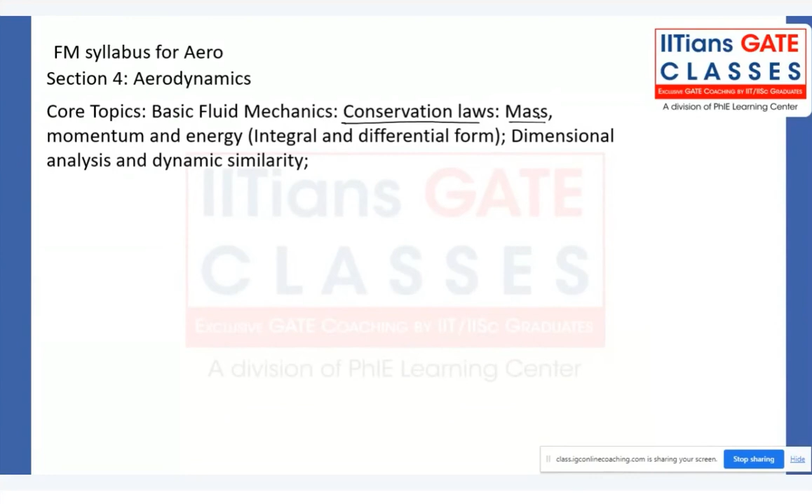Any of you in the class, whether you know about the continuity equation or not - you might have studied it in BTech. Yeah, so most of you guys know the continuity equation, that is mass conservation, right?

And basically we use that. That is a very basic thing for fluid mechanics, because mass cannot go anywhere - it has to be conserved. Now that is one thing. Second thing will be momentum conservation.

Can you tell me - by mass conservation we are getting the continuity equation, right? By momentum conservation or the momentum equation, what are we getting? Which type of equation are we getting?

Yeah, that's fine, drag force you will be getting. But once again, by the momentum equation, that's the Navier-Stokes equation, correct? And of course we have the energy equation - whenever dealing with temperature changes or heat transfer, we deal with energy equations.

Then we will have dimensional analysis and dynamic similarity. But basically, when we say these things, precisely we are dealing with this core fluid mechanics topic they have mentioned. Definitely you will learn mass, momentum and energy conservation once again from the aerodynamics faculty also, so that is not my main aim of what's to be covered in this class.

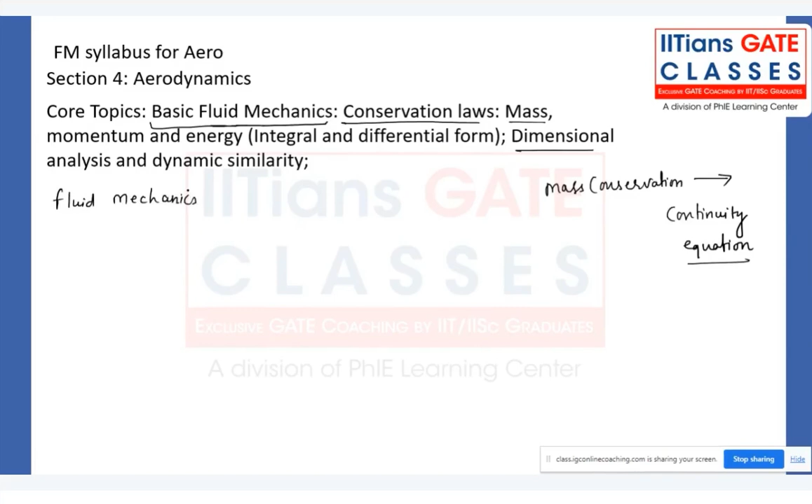So basically, if I write what fluid mechanics syllabus we will be covering - that is the official syllabus, a very official syllabus from the GATE website. But for fluid mechanics for aerospace, what are all the topics we have to cover?

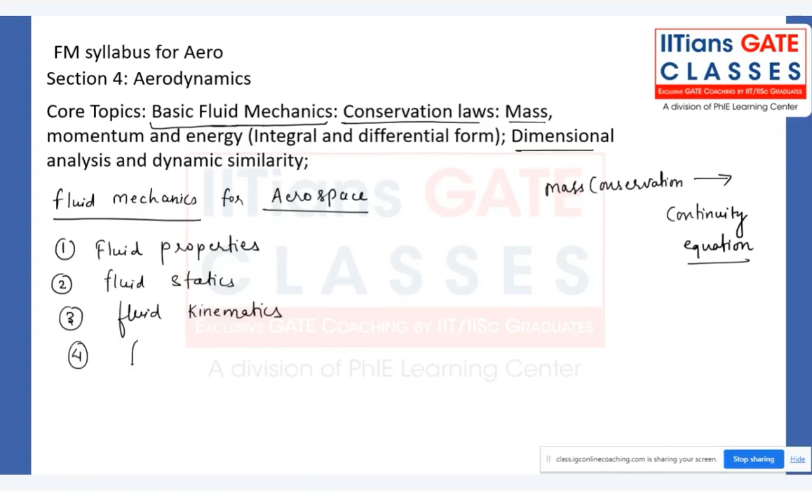The first one will be fluid properties. Second one will be fluid statics. The third one will be fluid kinematics. The fourth one will be fluid dynamics. The fifth one will be laminar flow.

Again, in laminar flow, we'll discuss each and every topic separately, case by case - one case will be fluid flowing between two parallel plates, fluid flowing in a pipe, and of course we have Couette flow. We'll discuss each topic, but you have to be a little patient. Sixth one will be flow through pipes.

Seventh one will be dimensional analysis and similarity. See, similarity - we don't have only one type, we have three types of similarity, but in the syllabus they have mentioned only one. We have geometric similarity, kinematic similarity, and dynamic similarity.

But why have they intentionally given this dynamic similarity? Because whenever you satisfy, for any prototype and model, this dynamic similarity, automatically your other two similarities - geometric and kinematic - will be satisfied. We will learn about that in detail in chapter seven. In chapter eight, we will deal with the topic called boundary layer theory, and the ninth one will be the basics of turbulent flow.

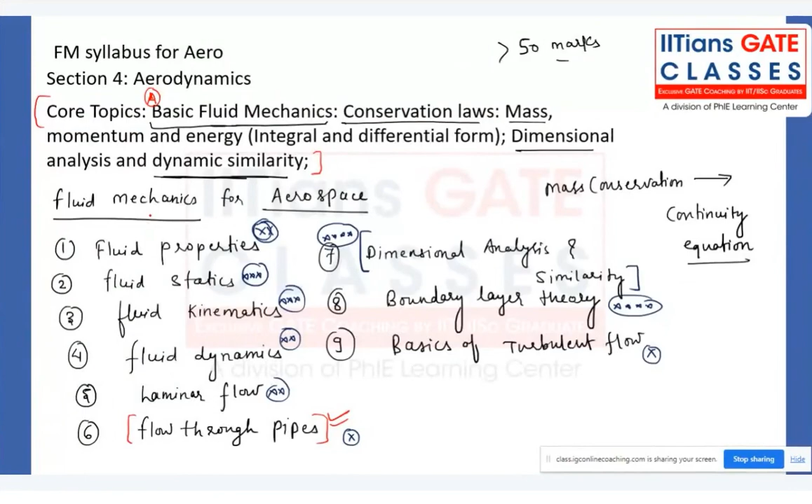Yes or no? If you observe this core topic, that is core topic number one in aerodynamics. If you observe the aerodynamics syllabus of aerospace, one topic is fluid mechanics, the other topic is compressible fluid flow. Yes or no, guys? Yeah, so these are basically the syllabus parts. Whatever the mechanical syllabus has, almost the same is there.

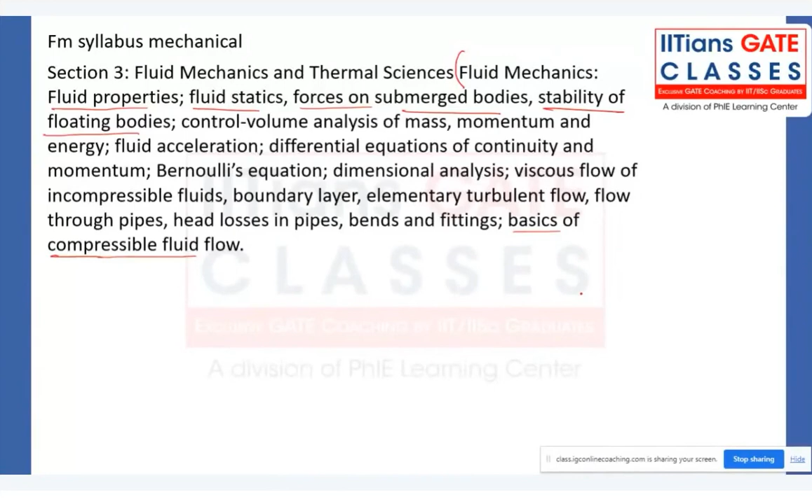There is no extra thing. But in our fluid mechanics class, which is going on and will continue for the upcoming 12 classes, you have to remember one thing: we are covering the common part, which is common for both mechanical and aerospace. So moving towards the standard reference book, because we have to practice from somewhere, that is a very important thing.

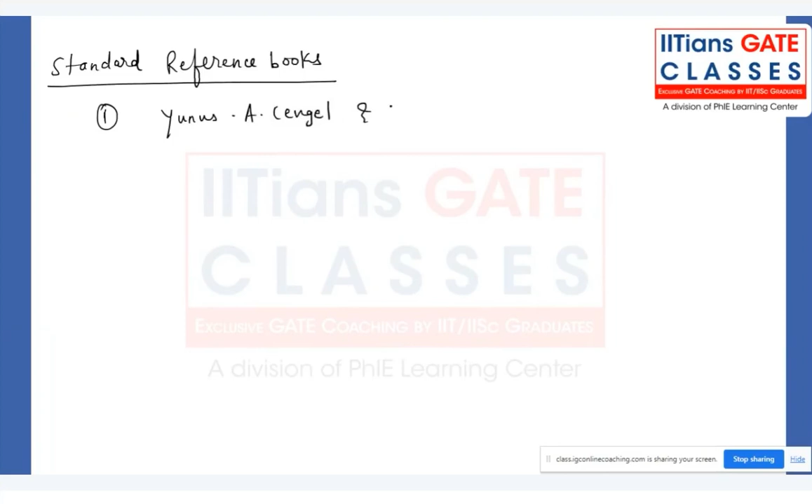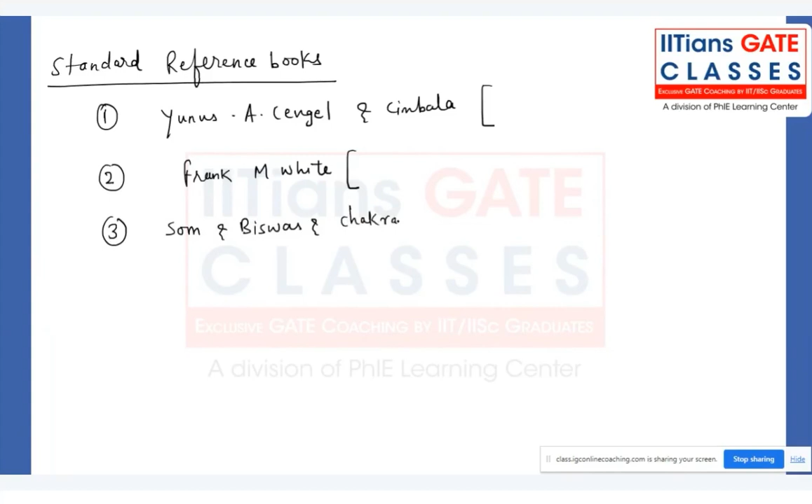So for the standard reference book, how many of you are aware of the Cengel and Cimbala textbook? It is known as Cengel and Cimbala. You have to refer to this. I will tell you the purpose also for each and every textbook. Then you have Frank White, FM White. Then I will tell you Som, Biswas and Chakraborty. These three are IIT professors from IIT Kharagpur. These are the legends of fluid mechanics or aerodynamics, whatever you say.

And then we have K. Subramanya, and then we have R.K. Bansal. Now, we should not follow R.K. Bansal because some of the things are not given accurately or precisely. Even some of the concepts are a little bit wrong. But still, I will mention that book for some reason, which I will tell you.

Now initially for 30 minutes, we will be discussing the syllabus part and weightage part because that is very important. Even though this course will be containing only 2 to 3 marks or 3 to 4 marks for aerospace, it is still very important, because whatever things we are learning are applicable for all the subjects. Whenever you are starting any topic or subject, you have to keep in mind from where I need to practice, what all things I need to practice, and up to what depth I need to cover the topic.

Now for concept understanding, I would say Cengel is one of the best for concepts. But for numericals also it is very good. Especially what we observe is that students who follow for conceptual clarity, they follow Cengel. Even for interview purposes also, it is one of the very, very good books.

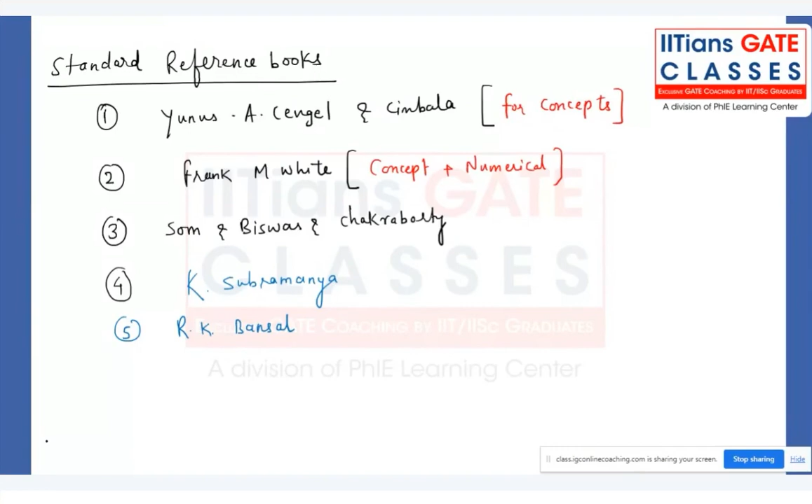FM White, that is concept plus numerical. Believe me, if after my classes you read fluid mechanics, you will basically enjoy reading this particular book, because FM White covers the beauty of fluid mechanics. It is way beyond imagination, in what depth they have given each and every topic. Initially when you read it, you will feel you're not able to understand even a single line. But after my 12 classes, you just go through that book, and it is helpful not only for fluid mechanics but also aerodynamics. If you want to cover Navier-Stokes derivation or anything, you can cover it from that particular book.

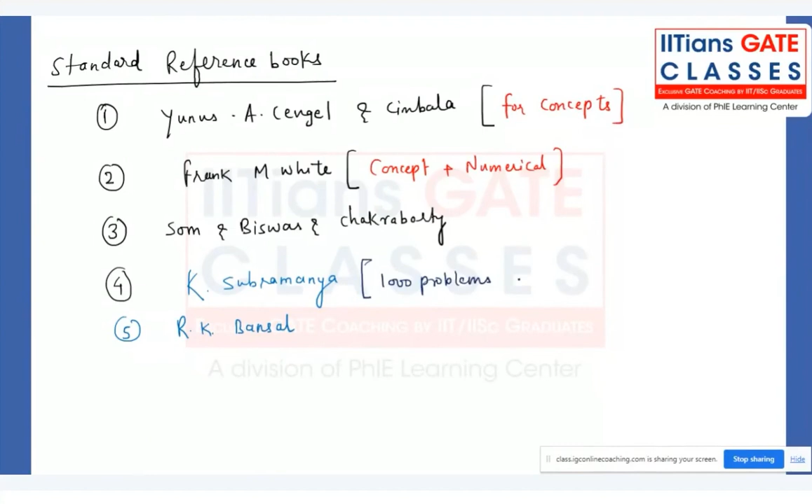Subramanya, we have the thousand problems book. Basically this particular Subramanya book is to be followed for only and only problems, right, only for problems.

But while solving this particular Subramanya, you have to keep one thing in mind: there are mistakes, a lot of mistakes, in calculation, not in the question but in the calculation or maybe the answers. So you have to verify with your friends. You have to share the questions so that whatever answers you are getting, if they are also getting the same answer, then you can finalize it.

RK Bansal, I would say, for very basic numericals. Sometimes we used to study so many hard things, so many hi-fi things, that we forget to learn very easy things. In the GATE examination, basically they are testing very easy things plus aptitude in every topic. They do not expect that you learn some rocket science thing and come up on the final day with some very high profile kind of practice questions to solve every question in one minute. That is not the fundamental thing of conducting GATE examinations. No, it's about whether you know the basic thing with a little bit of understanding of that particular topic or not.

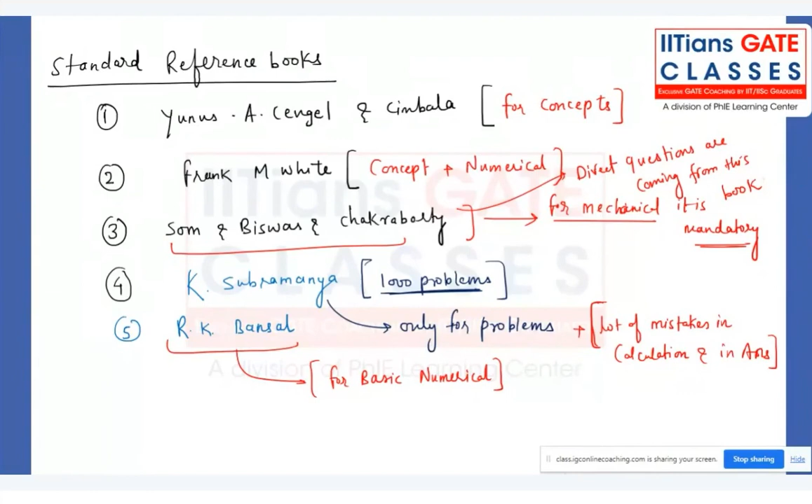Now, so this is regarding the textbooks. Now coming to the weightage part.

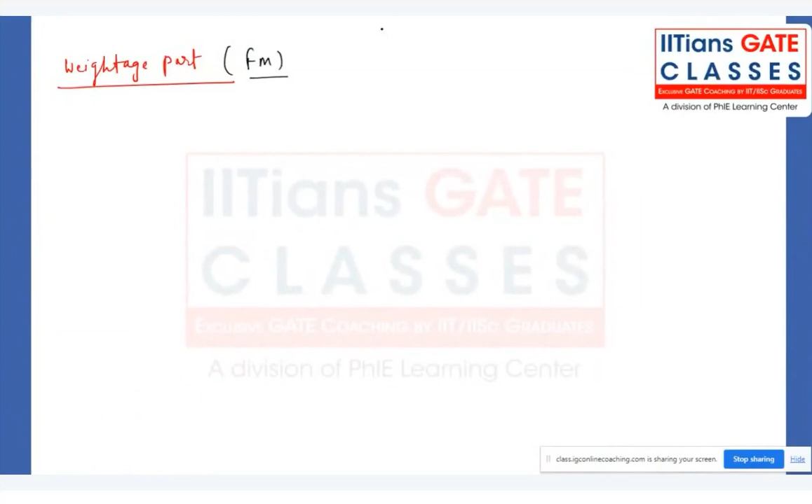Now regarding the weightage part, regarding fluid mechanics. So here, what I will say for aerospace, I'm not including any topic other than what we call FM, right? In aerodynamics, you have 4 topics, so I am just covering only one part of the topic of aerodynamics.

For aerospace, usually it varies from 3 to 4 marks, right? But surprisingly, in GATE 2022, it has been asked for only 7 marks, and 3 to 4 marks they have covered from fluid statics only. So anything in any particular year, anything can happen. You cannot predict that it will come only for this many marks. It is just a general thing we should keep in mind, right?

For mechanical, it is basically varying from 6 to 9 marks, right? So this is regarding the weightage part.

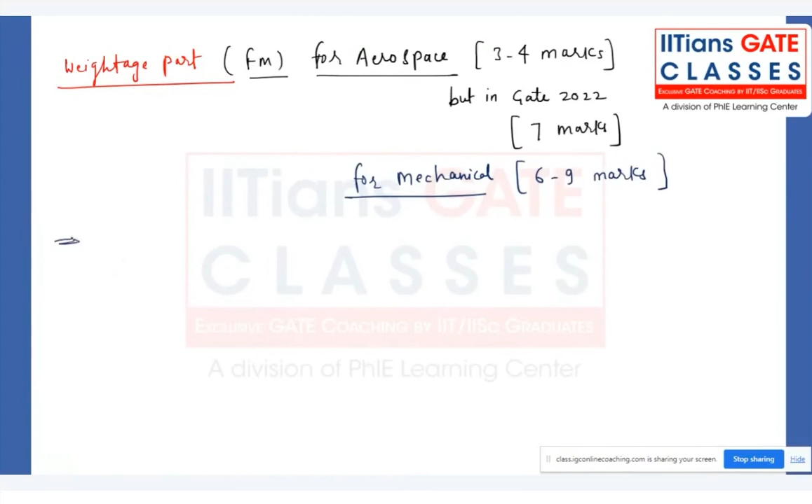Now I will not take much time and let me discuss the sources for practicing the questions. What are all the sources for practicing the question, guys?

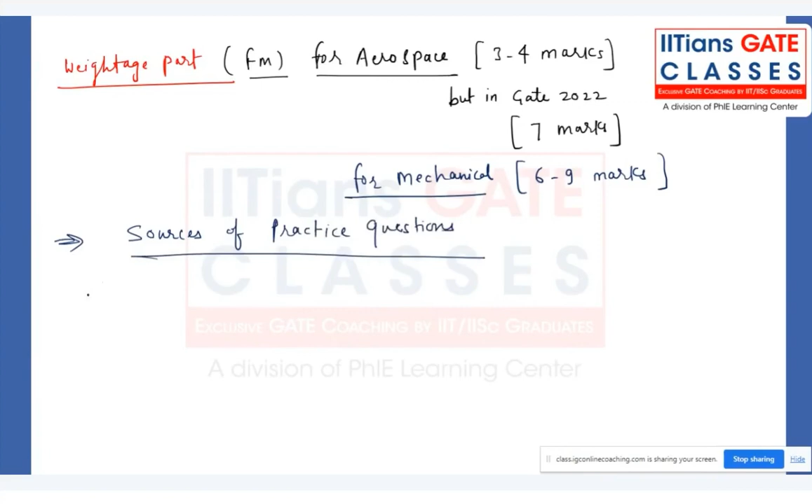Right, so first is IGC notes and whatever questions we will be covering in the class. Second will be the GATE previous year questions. The third one will be NPTEL assignment questions. And then fourth is a very important one - the test series.

Those who are getting the rank, whether they are in branch ABCD or whatever, they would have written this test series very seriously, and many test series they would have written. Those who are getting rank below 30 - without that, it is impossible. Whether you know aptitude, whether you know about the topic or not, it is one of the very important things.

So regarding star marks, I would say this is a very important 5 star, and of course this is a 4 star. GATE previous year questions, once again, very important. NPTEL assignments, I would say very important. Why is it so important? Whatever questions till now you have seen in your original GATE papers, from fluid mechanics or from any topic - flight mechanics, structures, or any other topic - they have directly copied from NPTEL assignments.

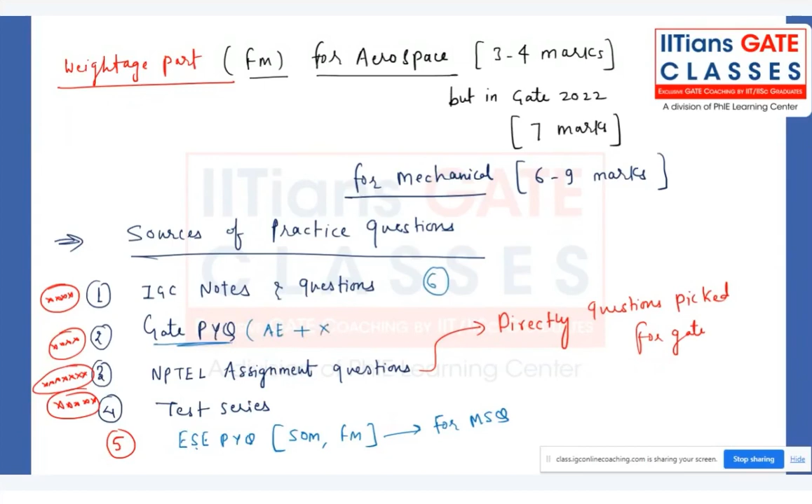You can also follow mechanical. You can also follow civil. So I think these are sufficient enough to keep you in track, or maybe keep you always busy practicing the question. Getting my point, guys? All of you getting my point? You will always be busy solving questions when you have just this many sources, right?

Once you have IGC assignment also - we have the IGC assignment also. Now, what is the importance of IGC assignment? IGC assignment's importance is that this assignment has been prepared from the standard textbooks, standard books.

So what is the benefit of practicing questions from the IGC assignment? See, when you see the textbook, for any topic you have infinite number of problems - at least 50 problems are there regarding one topic, but you will not have sufficient time. You will not be learning only fluid mechanics for a whole year, right? Instead of solving 50 questions, you solve only 10 questions from IGC assignment, because they have selected the questions out of those 50 that are most relevant and most challenging. Because if you solve all 1 to 50 questions, you won't know whether you're repeating the same problem, or doing one that's not relevant, very tricky, very tough, or whether it's important or not. So to clear all that confusion, you follow IGC assignments.

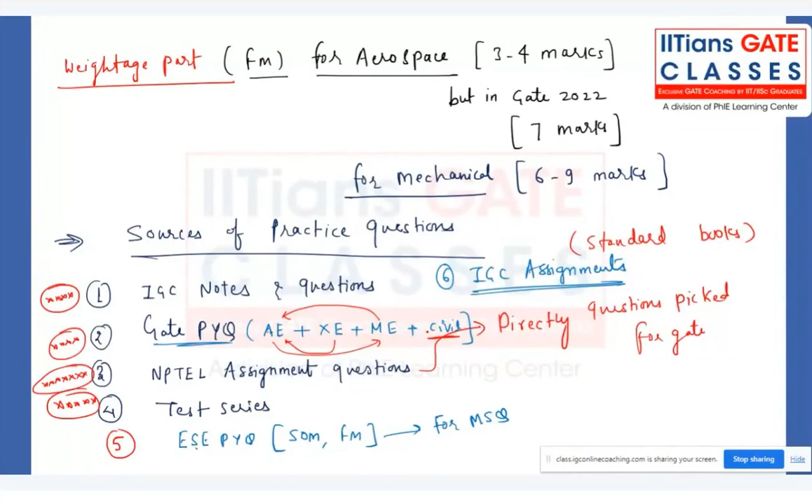Shall I move to the first topic called fluid properties, chapter number one? Note down chapter number one.

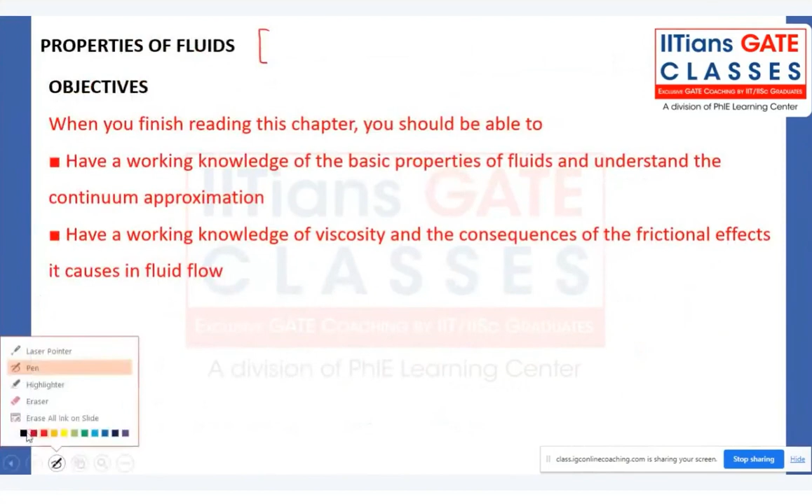So note down chapter number one - that is properties of the fluids. Fluid properties: what are all the properties like density, viscosity, thermal conductivity - these are the things we have to study.

Now guys, once again, before developing the understanding for fluid mechanics, see, few things we have to know. After understanding the fluid properties - before that, let me just tell you a little bit about fluid mechanics.

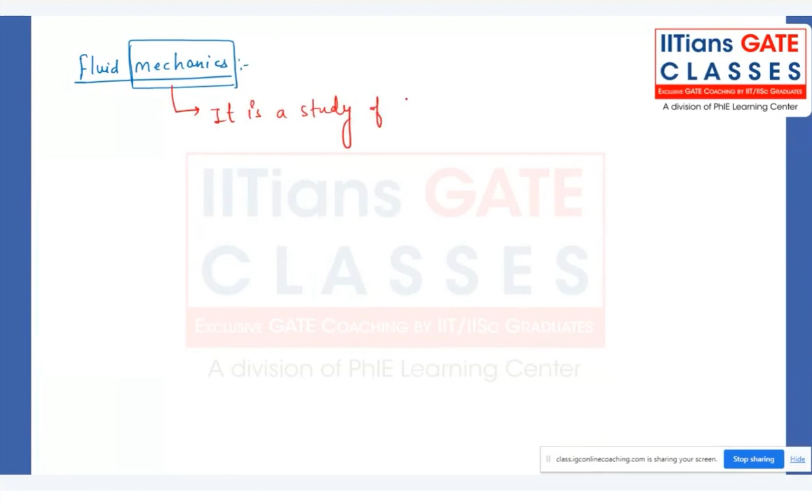Mechanics dealing with only motion or what? It is a study of effect of forces. It is a study of effect of forces.

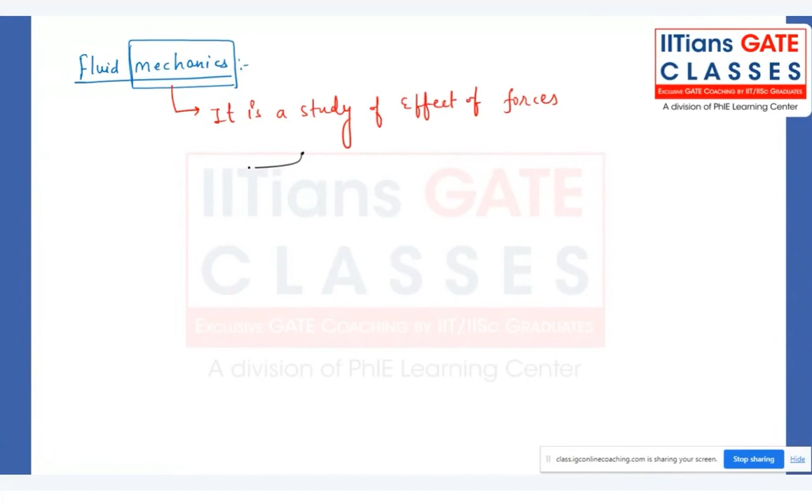Now, when I say study of effect of forces, you might have seen the body which is undergoing motion, or the body which is under rest condition, or the body which is undergoing deformation. If I say here, you will have a scenario where the body is completely under rest condition, a body which is in motion, and a particular body which is undergoing deformation. Anyone in the class can tell me, in engineering mechanics, out of these three, what have you studied?

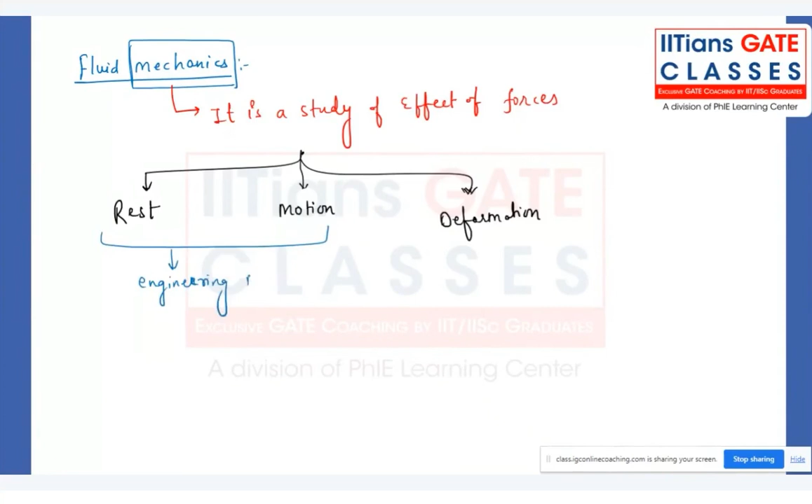So basically, you have covered these two things in engineering mechanics. You have not covered any deformation.

If I talk about deformations, we have different types: finite deformation, infinitesimal deformation. But we have not talked about anything regarding deformation in engineering mechanics, because we are dealing with rigid bodies, non-deformable bodies.

Engineering mechanics is nothing but dealing with non-deformable bodies, that we also call rigid body, rigid body mechanics, right? Now, my dear friend, what are all the things you have covered in strength of material?

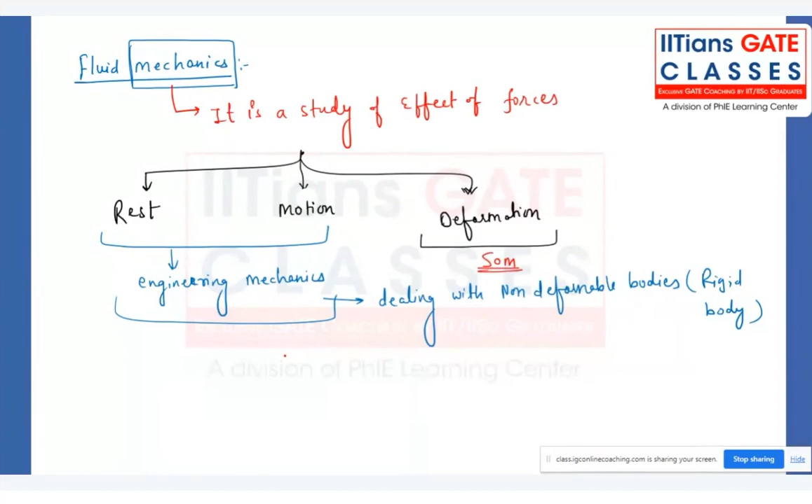What are all the things we will be covering in strength of material? This is strength of material or mechanics of solids. We will be covering the deformations, specifically dealing with elastic deformations.

Engineering mechanics deals with rest as well as motion, that's why we study statics as well as dynamics. For studying this solid body, engineering mechanics deals with the solid body - like a ball, a rod, anything which is solid. The solid state of matter we are dealing with here, we have categorized into two subjects: engineering mechanics and strength of material.

But in fluid mechanics, we are studying all three: that means fluid at the rest condition, fluid under motion, and fluid which is deforming. We don't have two particular subjects. All the things - rest, motion, and deformation - all three things we are covering in fluid mechanics.

Why? Because in fluid mechanics, whenever you say motion, the motion is not possible without deformation in a fluid element. And that deformation where motion is possible, we generally tend to say it's a shear deformation. Rather shear deformation, we say shear deformation rate.

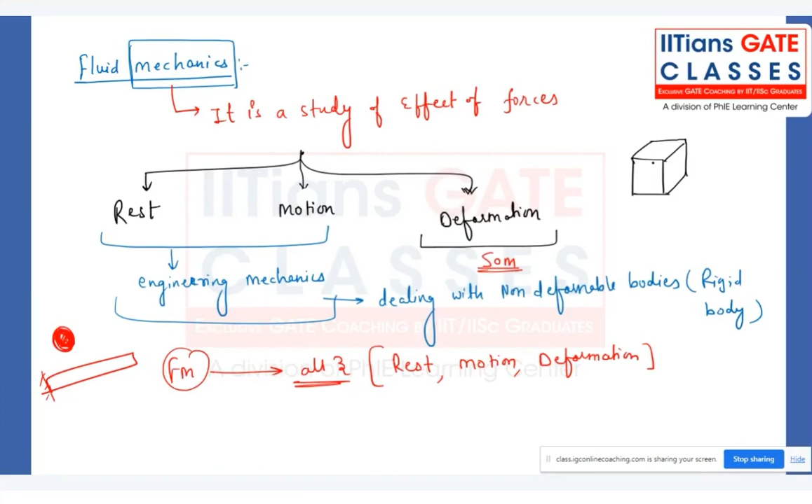But in fluid mechanics, if you want to have the motion, it has to deform. And that deformation has to be very, very continuous. Let's see about fluid mechanics - here, before starting the topic, just wait.

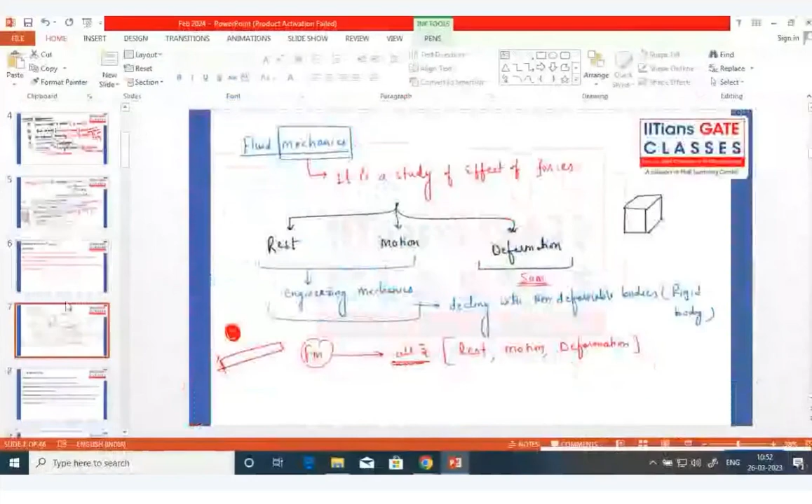In fluid mechanics, fluid under the rest condition we say that is fluid statics. And whenever the fluid is under motion condition and deforming, we say fluid kinematics and fluid dynamics.

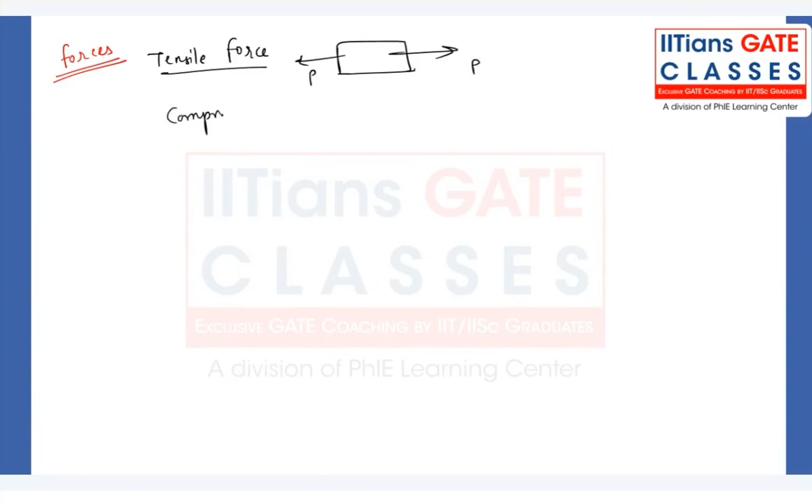So whenever we say forces - how many types of forces do we have? We have tensile force: suppose a body is there and we are applying the tensile force, like this. We have the compressive force: suppose a body is there and we are applying forces towards the cross section area of a particular body.

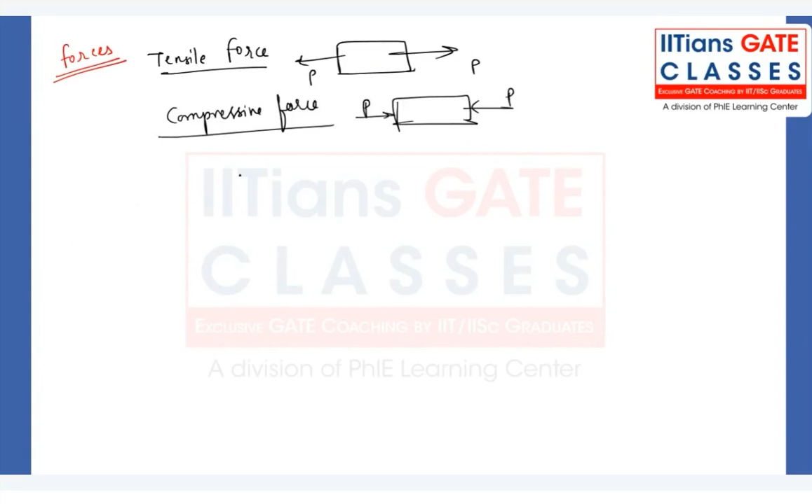And then we have the shear force. Shear force means any particular body or element is there and we are applying forces that is parallel to the surface, parallel to the cross sectional area. If suppose this is a cross sectional area, we are applying forces that are parallel, right?

Now, if you just say what is happening in fluid mechanics, you will be surprised to see. Let me show that. Some of you might be familiar with solid mechanics - whether you know structure or not a little bit. That's a very basic thing, like normal stress, shear stress, elastic properties, Young's modulus, bulk modulus, Poisson ratio. All of you are aware of that, correct?

So if you are aware a little bit, no need to worry. Here I want to say, suppose you have the solid body. We have whatever states of matter - solid, liquid, gases. Any other states? Plasma, that is the fourth state of matter, but we are not dealing with plasma here. I'm just talking about solid, liquid, as well as gases. So liquid and gases I'm classifying under fluids, and I'm talking about solid body here.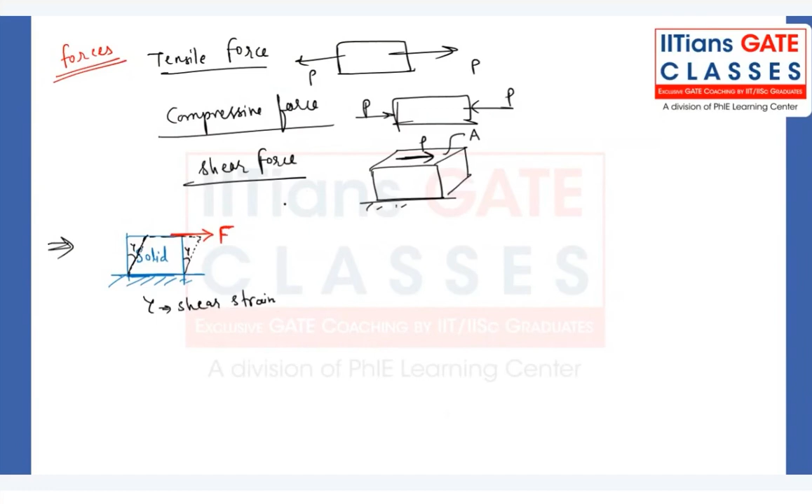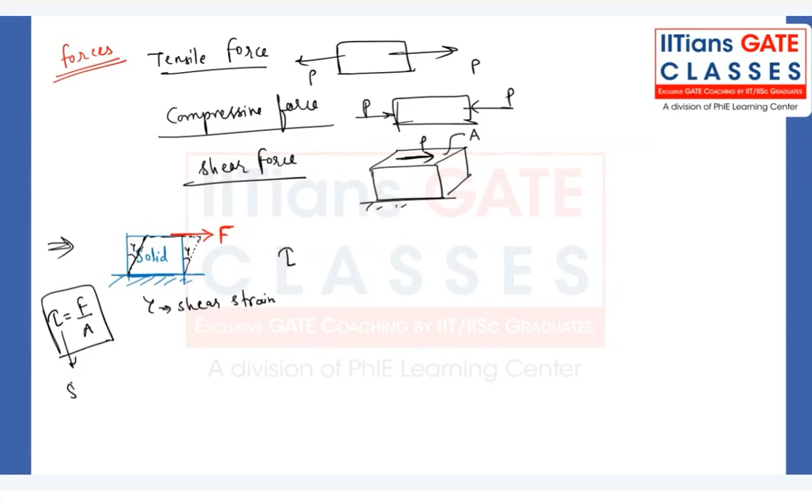Now, according to Hooke's law, for the shear stress or shear force, what have we learned? We have learned that shear stress is nothing but force divided by area. The shear stress is directly proportional to shear strain. And if I remove the proportionality, I get one elastic constant, that is nothing but modulus of rigidity.

Yes or no, guys? Modulus of rigidity, or we also say shear modulus. Yes or no, guys, whether you know or not.

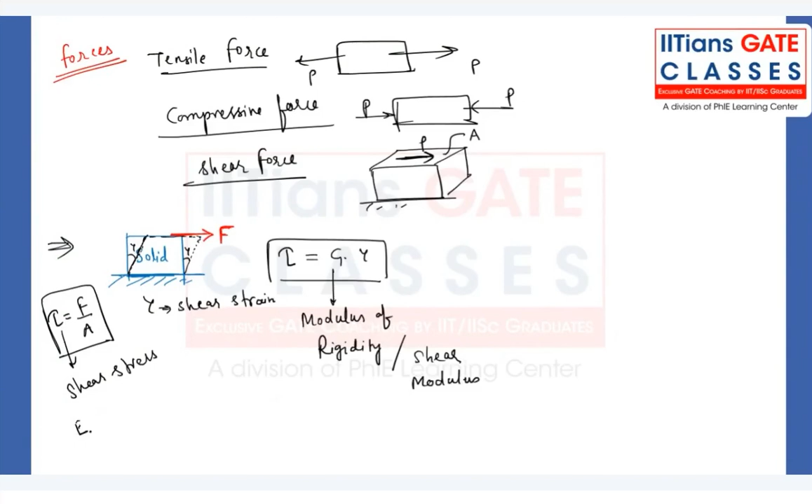We have the four elastic constants E, K, G, mu. One of the elastic constants I'm discussing right now is modulus of rigidity or shear modulus.

Now you tell me, every solid body, whether it is steel or any rod, any material, every material having a finite value or infinite value? Finite value, 80 gigapascal, 90 gigapascal. It will be having some finite value.

If it is having a finite value, tell me this particular deformation, whatever you are understanding, the shear deformations, whether that will be finite or infinite. This particular shear deformation will be finite in case of a solid body.

But when you try to see very carefully, if you take the fluid element, same fluid element, and place it hypothetically on a particular surface, and apply the same amount of force - I'm not changing the force, I'm applying the same force as I applied to the solid body - what is going to happen? We observe that the fluid will be deforming initially like this, even though a very small amount of force is there.

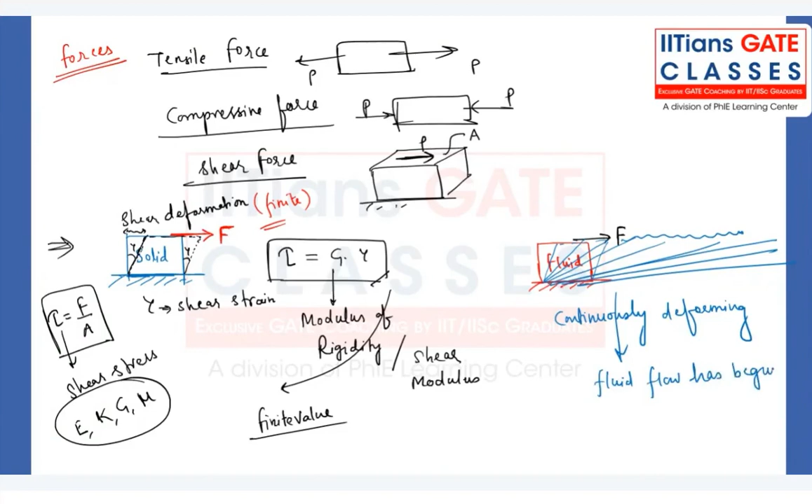Getting my point, all of you? Yes, it will never be able to regain its original shape, whatever shape it has, cubical shape. Why? Because there is no such property called modulus of rigidity for the fluid which is having some finite value. Nothing. It will be continuously deforming.

The moment you apply this shear force, it will be continuously under deformation, and that deformation will be infinite. And that's why we say that whenever fluid flow or motion is there, deformation, both are connected with each other in case of fluid, right?

So fluid response is a little bit different than the solid response for the same amount of shear force. Getting my point, all of you? Is that clear? Now make a note of it.

We say tangential force also, sometimes we say tangential force. So in one word, if I define fluid: fluids are the substances. Again, in fluid, both liquid as well as gases are coming. The fluids are the substances which deform continuously under the application of the tangential or shear force, no matter how small the value of the applied tangential force is.

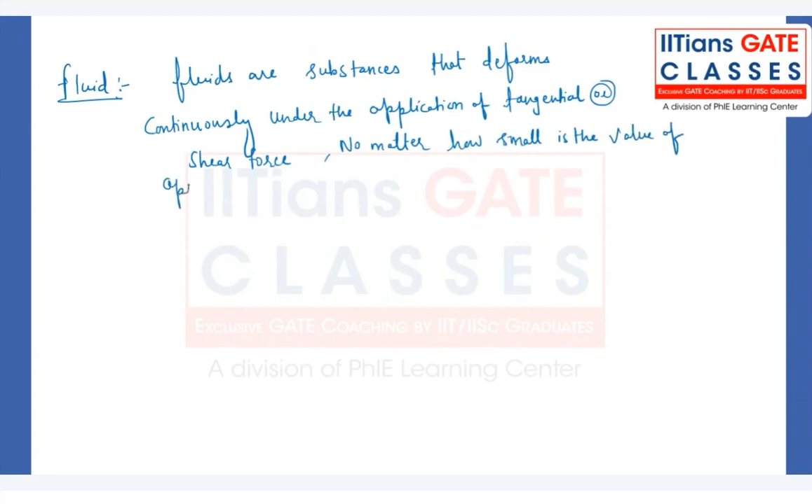Make a note of it. Then we will move on to our topic, chapter number 1, fluid properties.

See, when you see the NPTEL assignment for any subject, they have directly given the answers, there is no explanation, right? So definitely you have to work very hard to get the answer, to see the steps also, whether you have correctly approached for a particular answer. Sometimes you students get the answer, but the steps may not be correct. Again, that will be a very, very problematic situation.

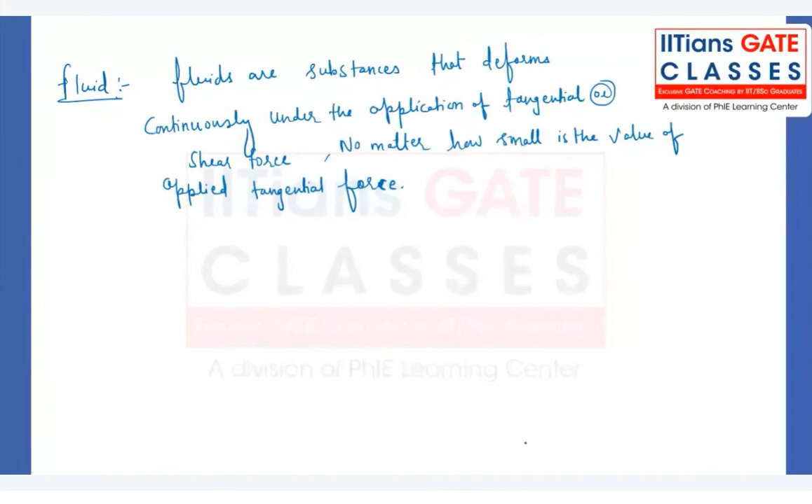Done? All of you have noted down? Note down, that is the introduction part.

Property: any characteristic of a system will be called property. Properties are to be considered either intensive property or extensive property. We have two types of properties, right?

Again, in thermodynamics also you will be learning this, but right now if I say intensive property, intensive means its name itself is suggesting it is independent of mass of the system, such as temperature, pressure, density. And extensive means the name itself is suggesting the extent of that, that the property depends on the particular mass of the system.

What are all the examples? Total mass, total volume, total momentum - these are the examples of extensive property. Just note down and understand line by line. Then I'll be giving you some examples, and you have to tell whether that is intensive property or extensive property, right? Getting my point, all of you?

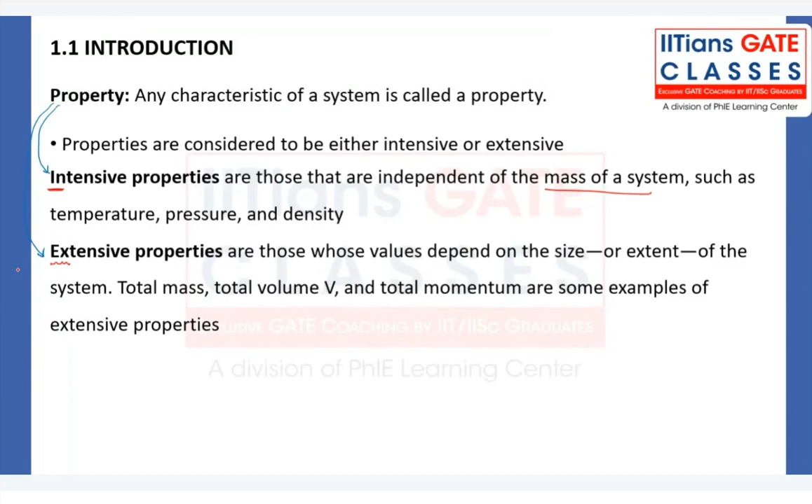See, whenever you take any example of one particular room, or suppose a control volume I have selected, in this control volume, my dear friend, you have molecules, right? That is not a vacuum. Whatever room is there right now you are sitting in, tell me whether air is there or not. Where you are sitting right now and watching these lectures, whether atmospheric air is there or not - if it is there, can you say it is not a vacuum? We have some air, some gas molecules are there, right? Getting my point, if that is there, my dear friend?

That particular room I have taken, and in one segment versus another segment, I have divided that room by some partition wall. Initially I have the mass m. When I have divided equally, right, initially this particular room is having some volume v, but right now I have divided it into v by 2, v by 2. Let's say, for example, if I divide the room into two compartments, whatever mass will be there, that will be divided or not? Tell me guys, that will be divided.

And whatever air particles having the pressure value, let's say p-atm, whether p-atm will be divided, or this air molecule will have the same p-atm, will it be same? Yes. Atmospheric pressure exerted by that fluid particle in a room space or room wall, that will remain same, right? And that's why we are saying pressure. And regarding temperature, let's say your room temperature is 25 degrees centigrade - after dividing the room by the partition wall, still the temperature will remain same. That's why temperature and pressure will be classified under intensive property.

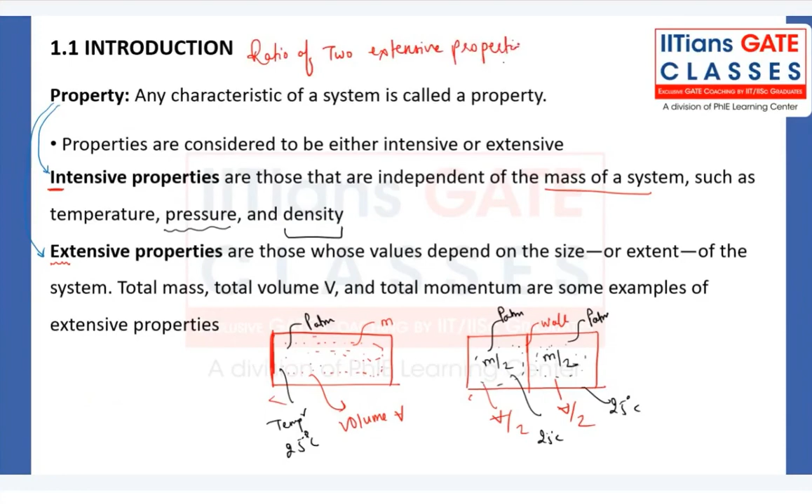The ratio of two extensive properties, what you're saying? Correct, correct. The ratio of the two extensive properties will be called an intensive property. Make a note of it.

My dear friend, if I ask you about viscosity, how many of you know about viscosity? Whether it is a fluid property or not, tell me guys. I want to say, by fluid property, whether it can change under any other circumstances.

It's a fluid property, and we have one term. Now tell me, will that property be intensive or extensive? That is a property, we know that, that is a fluid property. But is that fluid property intensive or extensive? Whatever air molecules are there, they're going to have some kind of viscosity, some value will be there, Pascal second, right? After dividing the room, whatever molecules are there, they're going to have the same viscosity, right? Why would they be divided? Why would they get changed? No. So you can also write viscosity as intensive.

If I mention the term specific enthalpy, do you know about specific enthalpy? You might be dealing with it in gas dynamics. Tell me guys, is that intensive property or extensive property?

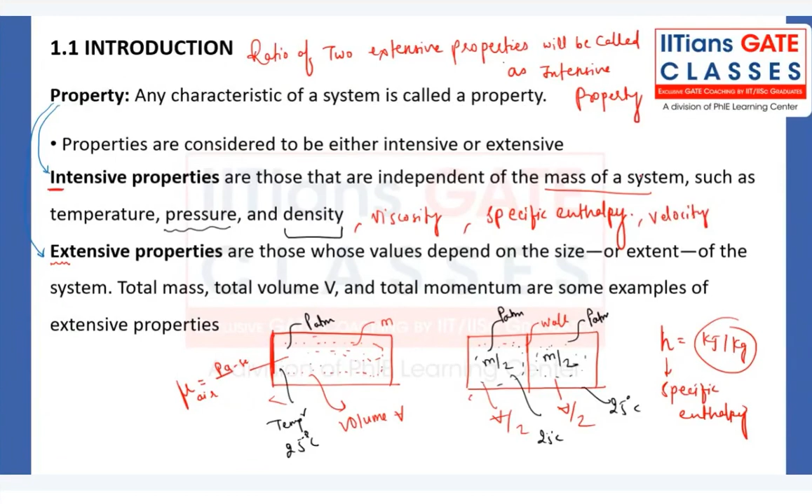What about the kinetic energy of the fluid particles, is that extensive or intensive? Total momentum is nothing but mass into velocity. Once again it depends on mass. Kinetic energy, half of mv square, once again it depends on mass. So once again that is extensive property.

Potential energy, mgh. Once again, that is extensive property, right?

What about electrical charge? What about the magnetic field? These are all depending on the particular mass of the system, right? Mass of the system, so we are classifying them under extensive property. Remember, electrical charge and magnetic field depend on the mass of the system, and that's why we classify them under extensive property, right? Make a note of it. Once it is done, let me know.

So the next concept is very, very important. How many of you are aware regarding the concept of continuum? Before understanding the concept of continuum, I will be discussing density, specific gravity, and a few more terms.

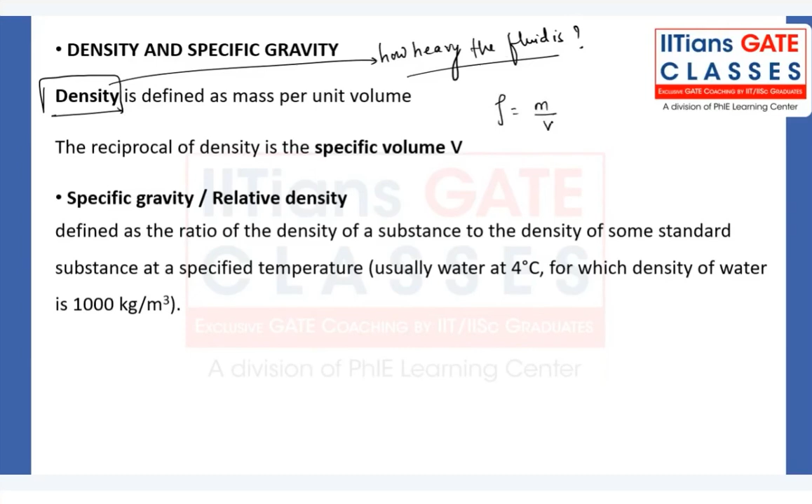What is the unit? Kilogram per meter cube. In terms of dimensions, what can you write? Kilogram is mass, meter to the power minus 3.

Now tell me the effect of temperature on the density, how density and temperature are correlated with each other. See, you can follow the ideal gas equation, but whether it is applicable for the liquid, that is the question.

Under a very low pressure, whatever water vapor is there can be treated as ideal gas. When the pressure is less than 10 kilopascal, can we treat the water vapor molecules as ideal gas? Yes. These are the few things you must be aware of, which you will be learning in thermodynamics.

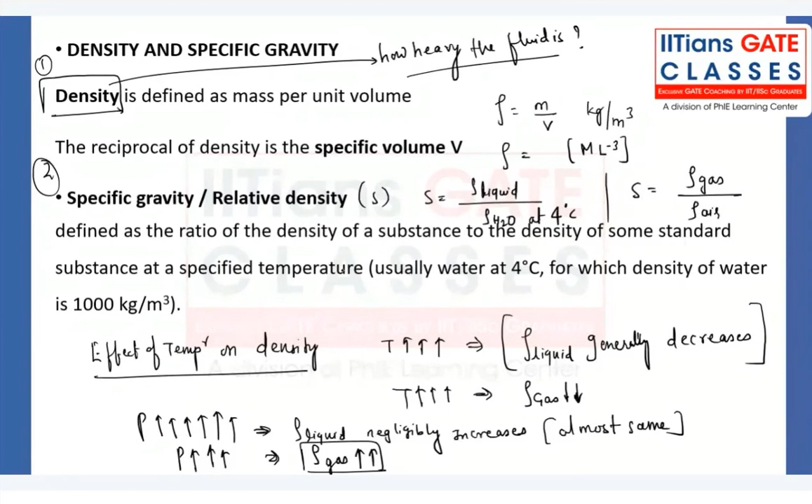Getting my point? What is the standard fluid by means of which we are comparing? In case of gases, we compare with air. In liquids, we compare with water. Specific gravity is defined as the ratio of the density of any substance to the density of some standard substance at a specified temperature, usually water at 4 degrees centigrade, for which the density of water is 1000 kilogram per meter cube.

Because if we change the temperature, at 20 degrees centigrade water does not have density value 1000, it has 998. But would you ever use 998? No, right. So that's why we take at 4 degrees centigrade the maximum density of water, that is 1000 kilogram per meter cube.

Now, generally, I'm not applying the ideal gas equation to say that if I increase the temperature... the ideal gas equation is P equals rho RT. So when you vary the temperature keeping pressure constant, you'd say density is inversely proportional. But you can apply this only at very low pressure for the liquid case. Generally, what happens in liquids is that when you increase the temperature, the molecules tend to go away from each other.

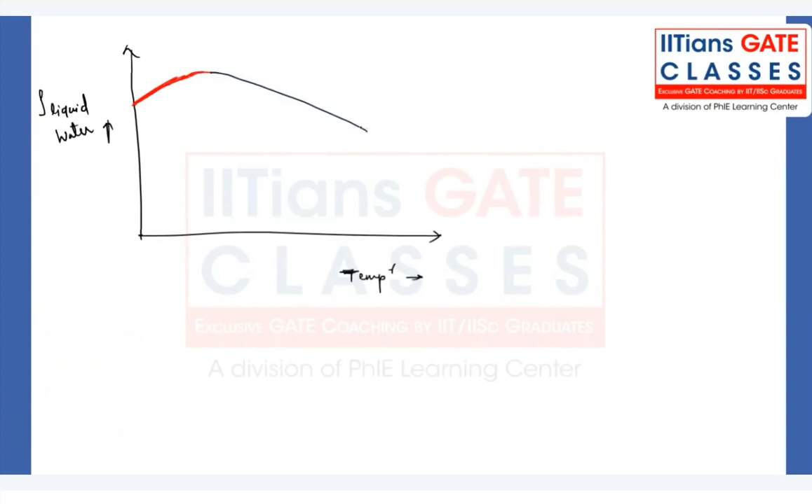Here when you see the graph, you will observe that initially it will increase up to 4 degrees centigrade, but generally experiments show that after that it decreases. So this particular point where it is increasing is 4 degrees centigrade, and then let's say this is 20 degrees centigrade. Here you have density 1000 kilogram per meter cube.

Once again, why is this trend there? When you increase the temperature of the liquid particle, the liquid particles go away from each other, because the liquid then becomes vapor, and that water vapor - I told you - when you increase the temperature beyond a certain limit, you can treat the water vapor as an ideal gas when the pressure is very, very low.

Remember, we are talking about when pressure is low; when pressure is high, the scenario will be different. So when temperature increases, molecules go away from each other, volume starts increasing for a fixed mass, since mass cannot change, volume increases for each molecule. Then mass by volume, density starts decreasing. This is the trend that usually happens with liquids as well as gases, but the typical behavior from 0 degree centigrade happens because of the ice structure and all - that will be discussed by the thermodynamic faculty. Getting my point?

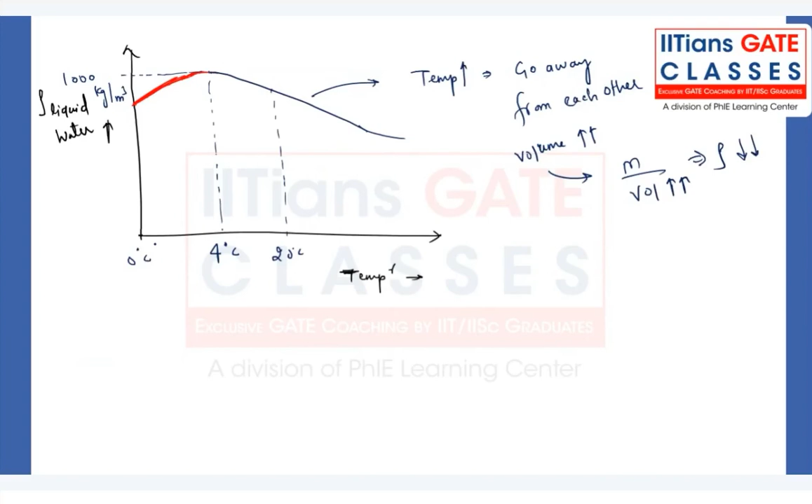Usually in this particular zone, if you ask me by the formula, the change in density happening is that density is increasing. Density increasing means mass by volume - volume is decreasing. Volume decreasing means the molecules are coming closer. Upon increasing the temperature, molecules are coming closer.

That is what will be required. We will not be dealing with why and all, because that is a separate topic called pure substances, which is being dealt by the thermodynamic faculty. If I deal with that, again 30 minutes will be gone.

Is it that clear, all of you? But basic thing you must be aware of, right? These are the important basic fundamental things. Whether all of you are understanding the subject or not, tell me guys, or are you feeling distracted from the topic.

I used to tell you by the formula also, and sometimes we will be discussing by theoretical explanation also, so that you get the feeling of that topic. Feeling of the topic is very important, guys. Whenever a tricky numerical comes, you can attack that question with full confidence. If anything is missing in your conceptual understanding, no matter how hard you work, you will not be able to solve the question with 100% accuracy, because every numerical requires some fundamental understanding of the question being given.

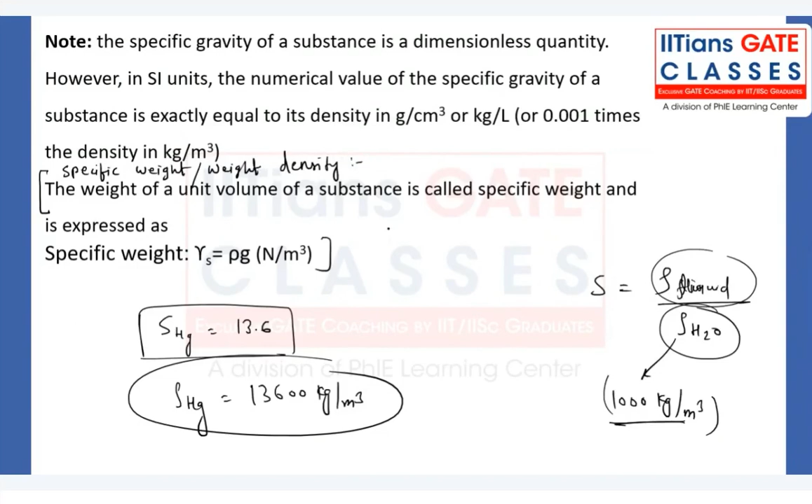It is weight per unit volume. Weight is Mg per unit volume. Mass is volume into density, and by volume, so this will cancel out. So we get rho g.

And what is the unit? Newton per meter cube. In dimension form, what is the unit of Newton? Mass into acceleration, so we can write M L t minus 2, because acceleration can be written as meter per second square, L t minus 2, divided by meter cube. So what can we write?

Tell me guys. Make a note of it. With the help of specific gravity, you can say how heavier the liquid or gas is as compared to the standard fluid.

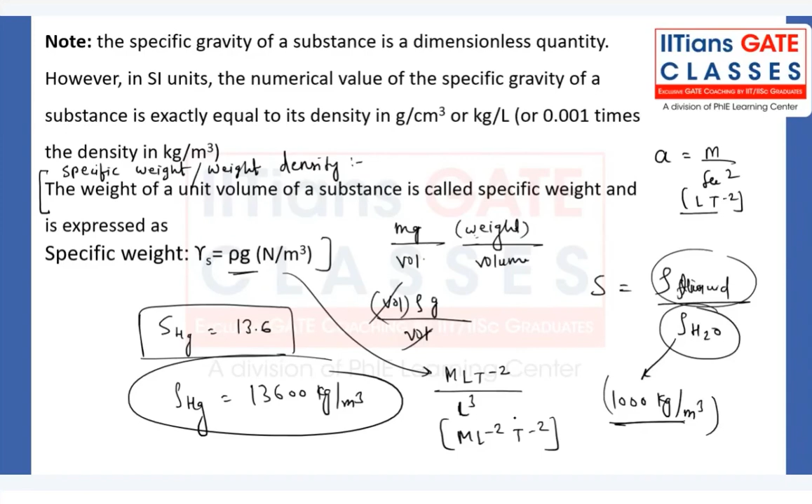Note down the density of the ideal gas. Any gas will behave like an ideal gas under which condition? Tell me, guys - at a low pressure and high temperature, or at a high pressure and low temperature?

Whenever we are dealing with any gases, we treat them as an ideal gas under low pressure. You are saying opposite? And high temperature. Please check it out, all of you, verify it.

Yes, it will be valid under low pressure and high temperature. Now, what is the ideal gas equation? PV is equal to MRT, which we can also write as M by V RT, where P is equal to rho RT.

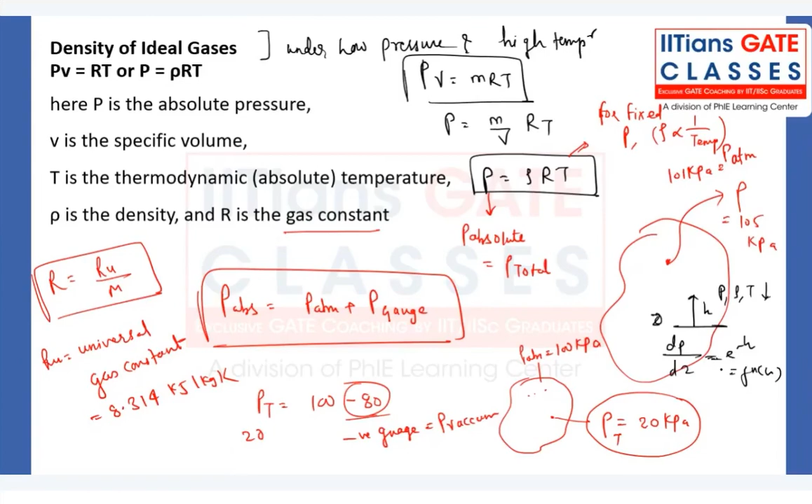Now all of you have noted down. For the air, if I say what is the R value, you might be using R value frequently in gas dynamics. 8.314 divided by air molecule mass is 28.97, we treat it. So almost, what is the value? 8.314 divided by 28.97, that is 0.287 approximately, kilojoule per kg Kelvin. 287 is joule per kg Kelvin, right?

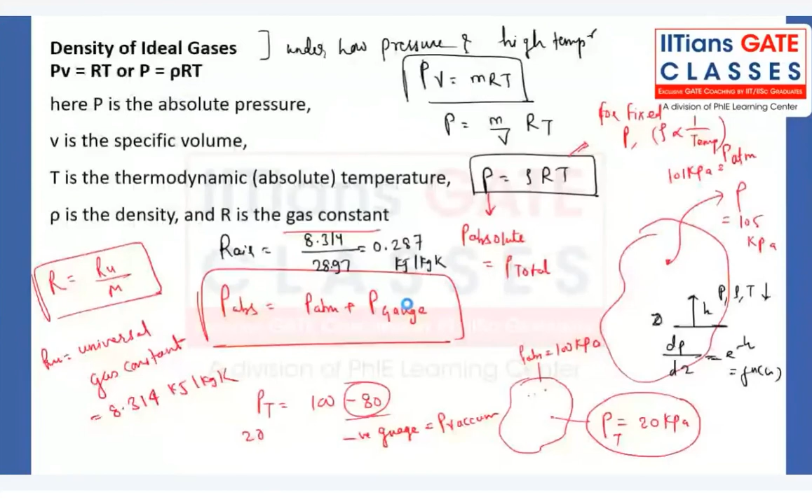Now, before discussing the viscosity, I would like to tell you one more property that is very, very important, and that is nothing but concept of continuum. Note down, concept of continuum. And all of you, please tell me in one line, what do you mean by the concept of continuum?

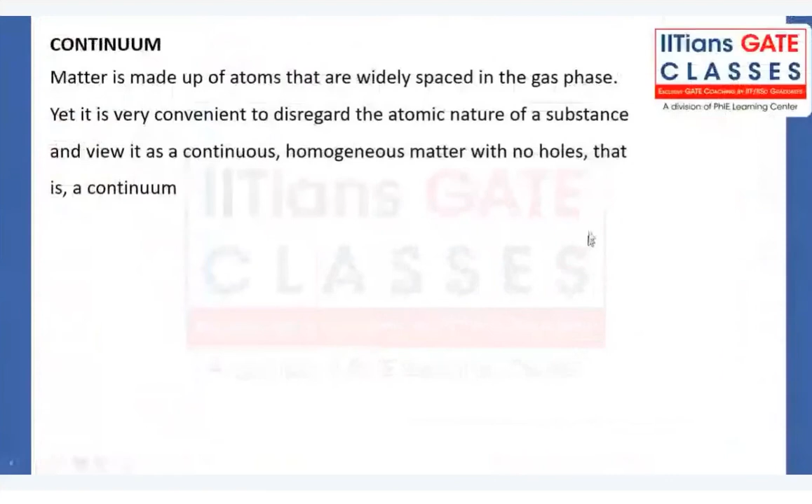Perfect, very good. I'm just impressed with your answers, whatever answers you guys are giving, because that is a true answer I would say. Vikas's answer, I'm totally impressed because you have directly given a clear picture of the concept of continuum.

Knudsen number is a number which is defined for validity of the continuum concept. Just like, if it is zero Knudsen number, so almost no holes, no gap.

Now tell me guys, note down, the matter is made up of atoms, right? If I just take one example, in a chamber or a particular control volume - see, control mass and control volume, what is the difference? Of course, I have not started fluid kinematics, but still you can tell me if anyone knows about that. If I say a control volume, if I say a control mass, in case of fluid, is it okay to define control mass? Or is it okay to say for fluid control volume, which is more suitable here?

In case of solid, suppose a ball, you can treat it like a control mass, right? But in case of fluid, where fluid is entering, fluid is leaving from a particular region, that region we define - one space we are selecting for our analysis purpose, and that space we are saying control volume. Getting my point?

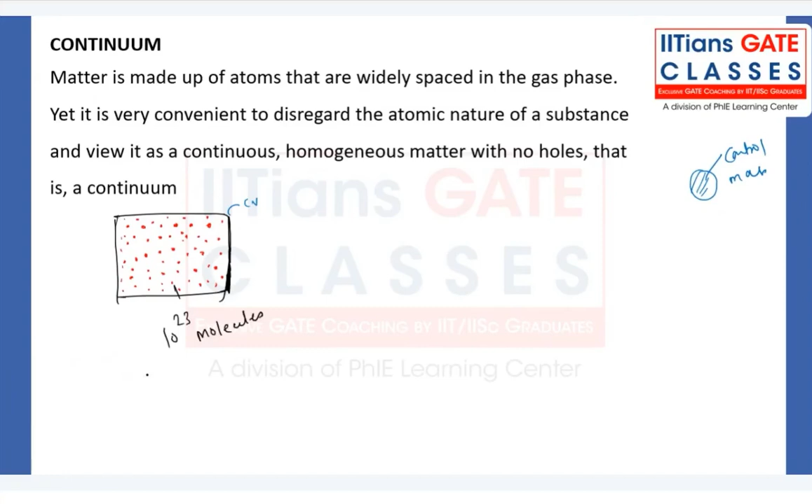In that molecules, suppose you have defined your system characteristic length to be like this. What is LC? Let me define LC as system characteristic length. Try understanding guys what I want to say from here - system characteristic length.

Understand, suppose you have a glass of water, right? You have one glass, in that you have water, and up to the full height of the glass you are filled with water. By default, whenever you look at the water, whatever glass is there, do you observe any gap? You can't see, right? You can't see any gap with your own eyes. Even if you take a microscope, also you cannot see any gap.

Suppose you are taking the part of the glass - suppose the glass is there and you have filled it with water up to the height of H, for example, and you are looking from here with your eyes. What is happening? There will not be any gap in between the molecules, right? Whatever the water particle molecules are there.

But when you look very carefully, only some part here, suppose, and when you just zoom it, what you will observe is that molecules are here, molecules are not there, molecules are there, molecules are not there, again molecules are there.

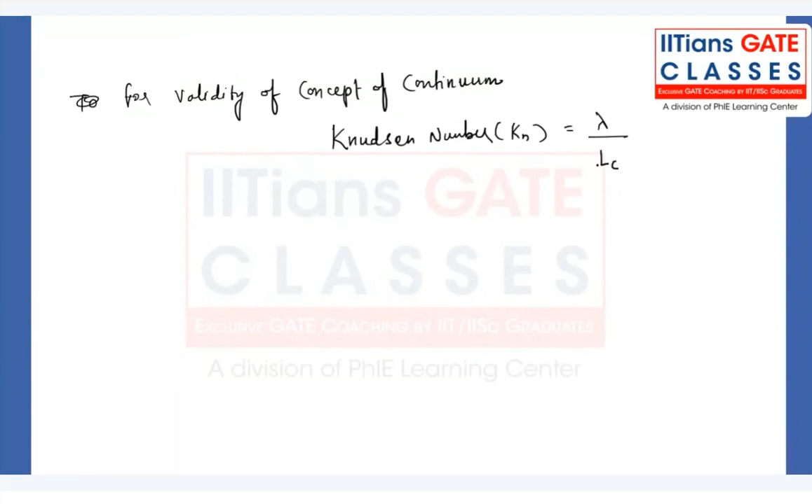What is that? The Knudsen number is defined as the ratio of what? Tell me guys, it is a ratio of the mean free path to the system characteristic length, where lambda is nothing but the mean free path.

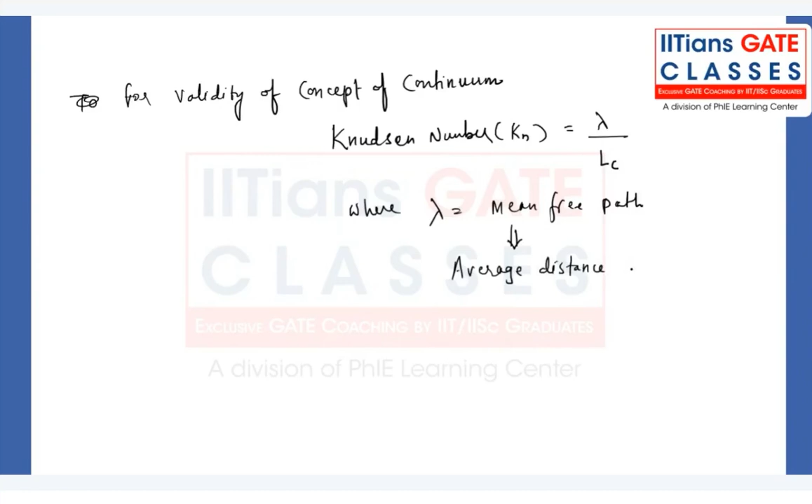What is the mean free path? Anyone know this? Mean free path is nothing but the average distance traveled by the molecule between two successive collisions.

Suppose molecule A is colliding with molecule B, and then colliding with molecule C. Suppose it has traveled distance S1 here, and distance S2 here. Now lambda is defined as S1 plus S2 divided by 2.

That means even if your system characteristic length, like the room or the glass of water, is taken very large, what happens? Even though the molecules will be colliding and jumping around, ultimately that tells you how much space is available between the molecules. Indirectly, lambda shows the gap between the molecules. If they jump from A to B to C, and that also doesn't significantly highlight the gap, that means lambda is very small as compared to the system characteristic length.

In that case, we say when the Knudsen number is less than 0.01, the concept of continuum is valid. Otherwise, if the Knudsen number is more than 0.01, what happens? We get non-continuum flow.

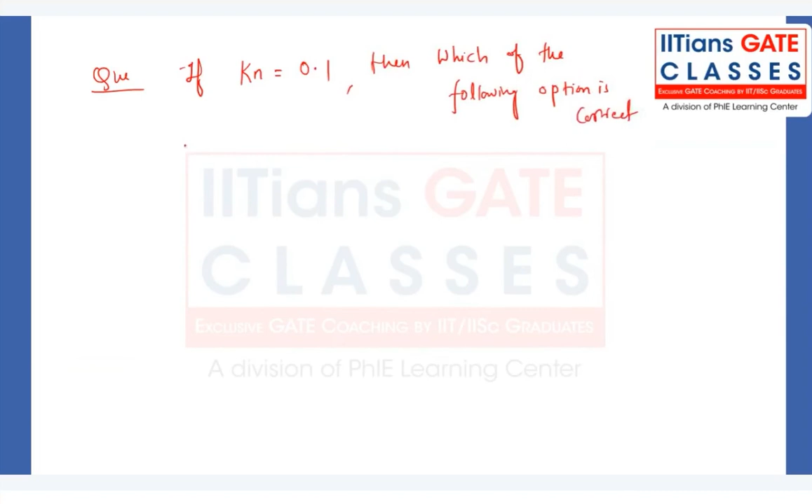Correct. Option A, continuity equation, valid. B, Navier-Stokes equation, valid. C, Bernoulli equation, valid. D, none of the above.

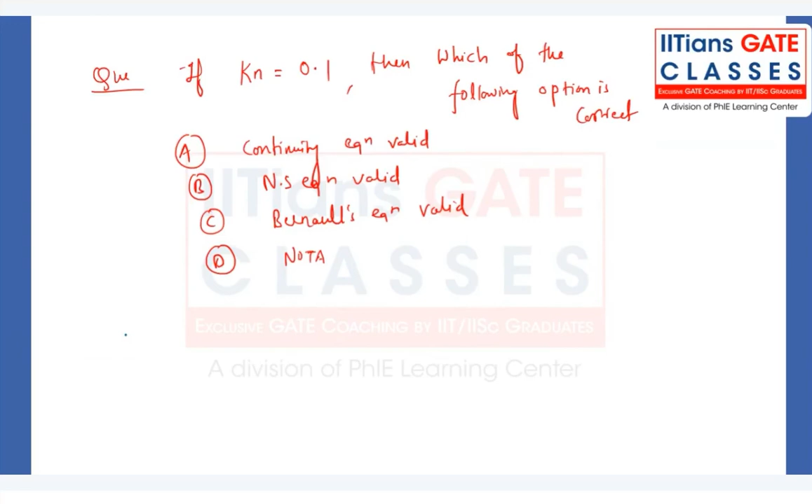See guys, try understanding in fluid mechanics, the concept of continuum will play a very vital role in understanding fluid kinematics and fluid dynamics. This concept of continuity, Navier-Stokes, Bernoulli, all has been derived by assuming there's no gap between the molecules. That's how they can play with the topic. Even a small topic, when put into the actual exam, all institutes will start framing questions from there. But after that, what is the use of that? Before that, we should know what are all the assumptions of these equations.

Assumptions are very very important, remember, for MSQ questions. If MSQ had negative marking, that would be hell of an exam. But they have given some relaxation that MSQ has no negative marking. If I were the paper setter, I would definitely put negative marking for MSQ, because those students who attempt MSQ without concept clarity will simply guess the answer and get the marks. If the guess is not correct, no negative marking, but for guessing, there has to be enough penalty. That's why it's not only a numerical ability exam. This past 2 years, what we are observing is more theoretical understanding. You can verify this in all subjects.

Now all of you note down this thing. If I go deep into this topic, I would make a plot of density versus system characteristic length. Some of you have doubts about this system characteristic length, I'll make sure to clarify. But before that, let me explain one thing: density versus LC.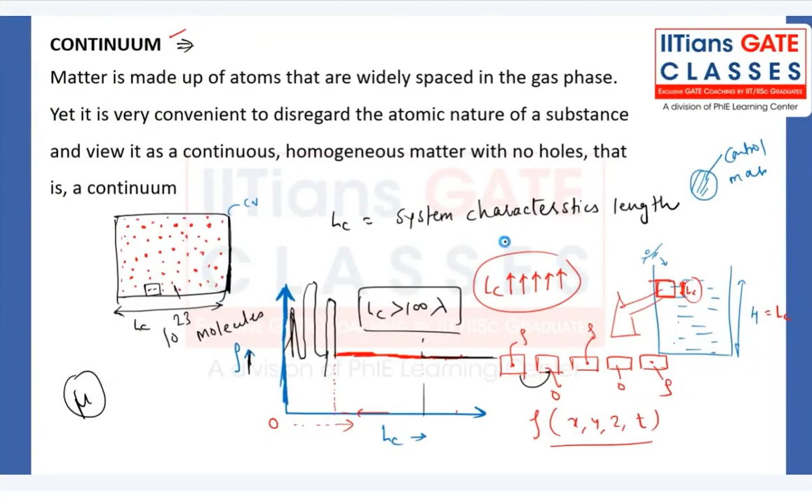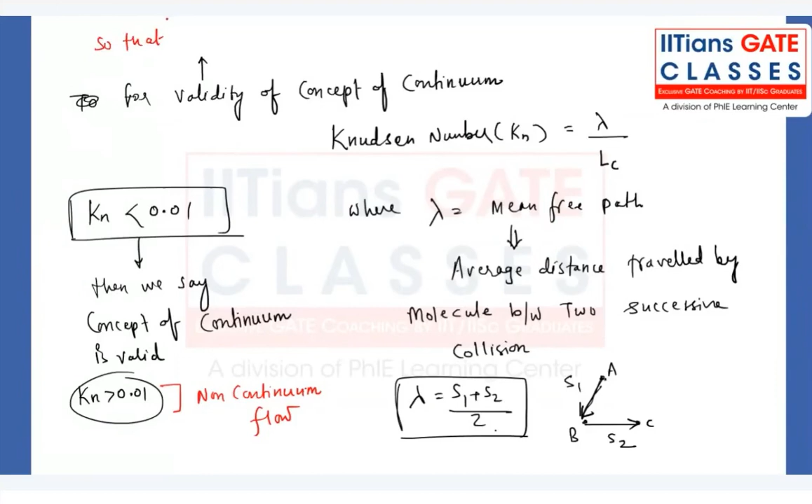Now guys, the validity of the concept of continuum we are saying, because we want to say... just wait. Why are we defining the concept of continuum? A big reason is what, guys? Tell me. What is the big reason for that? So that we can define property as a continuous function of space and time variable.

Everything, whatever the mathematical property or dependent function, should be continuous, right? That should not be discontinuous. When you understand limit, continuity, and differentiability, discontinuity is not at all useful for us. We want our function to be continuous. There should not be any jump. That has to be continuous. There should not be like this.

And one more reason is that even though at a micro level you have the gap, you almost neglect that gap, so that our analysis will be simple. Otherwise, a lot of complicated mathematical tools will be required, to define the property, as I mentioned.

Now the system characteristic length is again very important for us to discuss. System characteristic length is there to tell you what are all the dimensions, whether length, height, thickness, diameter, what should be the consideration for LC value. Now, in case you understand, what is the meaning of LC? System characteristic length.

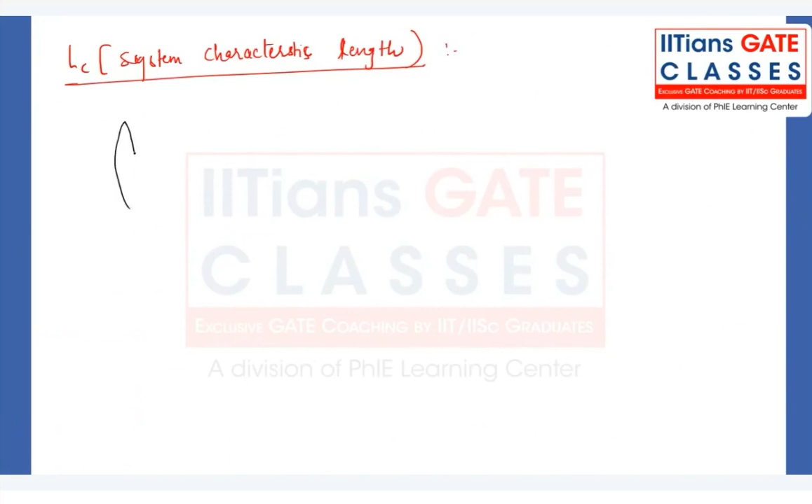System characteristic length, what do you mean by that? Now suppose in case of pipe diameter, in case of a pipe, I have two dimensions. One is the diameter and the other is the length.

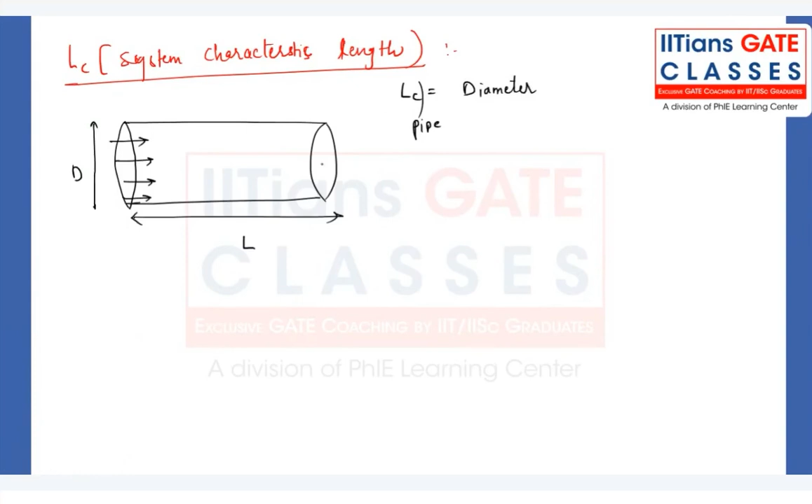If I ask you for the pipe flow problem, the fluid is flowing in a pipe, what should be the characteristic dimension? Whether it should be the diameter or the length. That is correlated to the fluid property, or the variation of the property along which direction it is more significant.

See, the length we don't consider, guys. We consider only diameter, over which you will see the variations, right? When you observe in the fully developed flow, this is a boundary layer, right? In the boundary layer, after developing regions, you will be having the fully developed region.

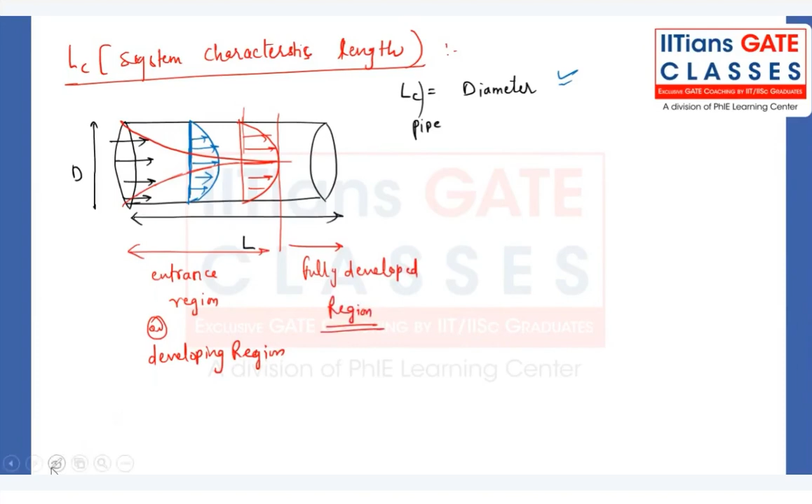Every time when you see, before the fully developed region, this is nothing but the entrance region or developing region. After that we have the fully developed region. In this fully developed region, what is so special about it?

Perfect, very good, 1D flow. That is one thing. Second thing is also that the velocity profile will not change. Velocity profile will not change.

Very good guys, because when you see from here, the velocity will be a function of radius as well as x from the inlet section. But when you see from here, after that, whatever velocity profile will be there, that will be almost parabolic in case of laminar flow, and that will be a function of radius. And that we will see in laminar flow.

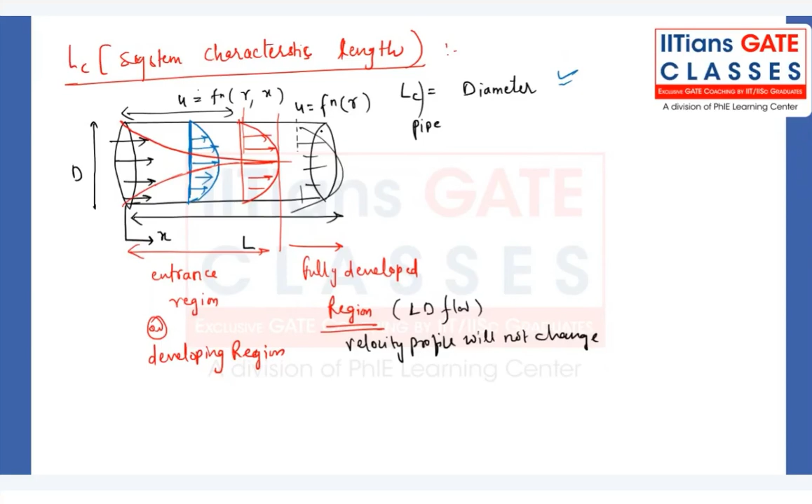Now, after the developing region, the length will not play any important role. Even though you increase the pipe length further, the profile will not change. Velocity profile will not change, right?

That's why, moreover, when you move along the radius direction, you observe that velocity is varying. Near the wall the velocity is almost zero, at the center velocity is maximum. So all the variations are happening along the radius direction. That's why the characteristic length is considered as diameter in case of pipe flow. But in case of a flat plate, what will be the characteristic length?

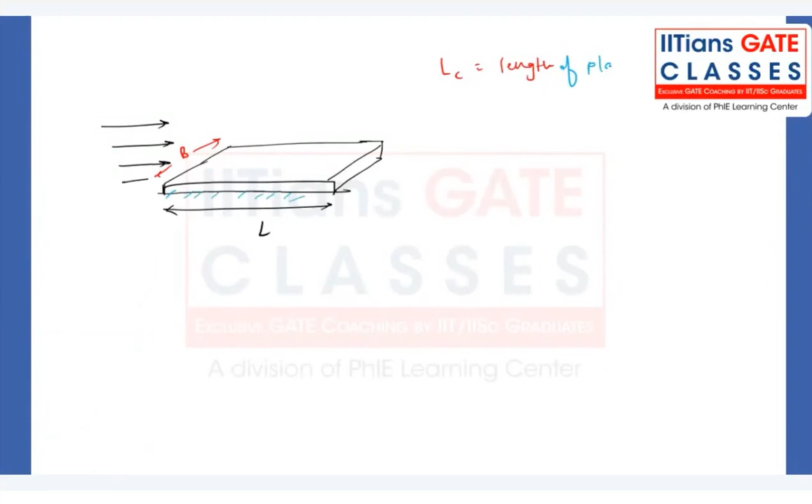In case of flat plate, flow over a flat plate having length L, tell me guys, what will you consider as the characteristic length, the width or the length? And that is, for a flat plate, the length of the plate. Very good. Because all the variations and important things are happening along the length of the plate.

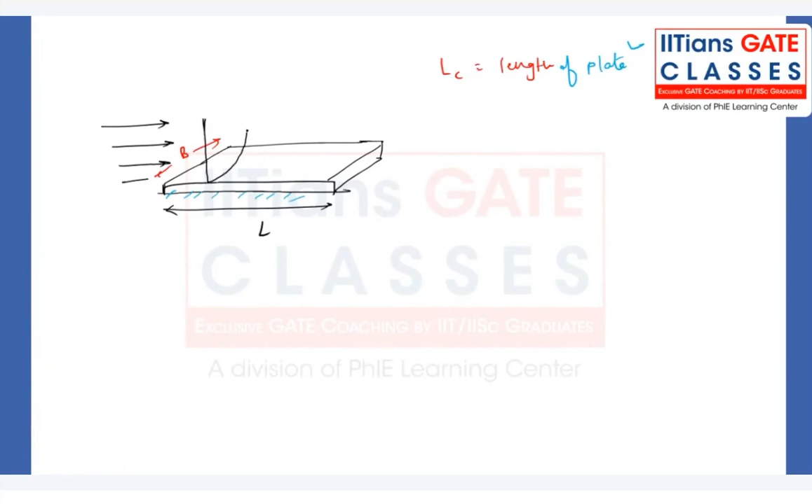Why? Because the velocity profile keeps on developing from here to here. For example, right, now I have made a bulky region for the turbulent flow intentionally. See, when you move along the length, Reynolds number, rho into V infinity into x by mu, that's the local Reynolds number. So as you keep marching along the plate, as you keep changing the length of the plate, Reynolds number keeps on changing.

So length is very, very important. Width over which it is happening is not that important for us. Over the length, the flow behavior changes from laminar to turbulent. And you know that in laminar and turbulent a lot of things have changed, right? So definitely length of the plate is playing a very important role here. Getting my point?

Is that clear to all of you?

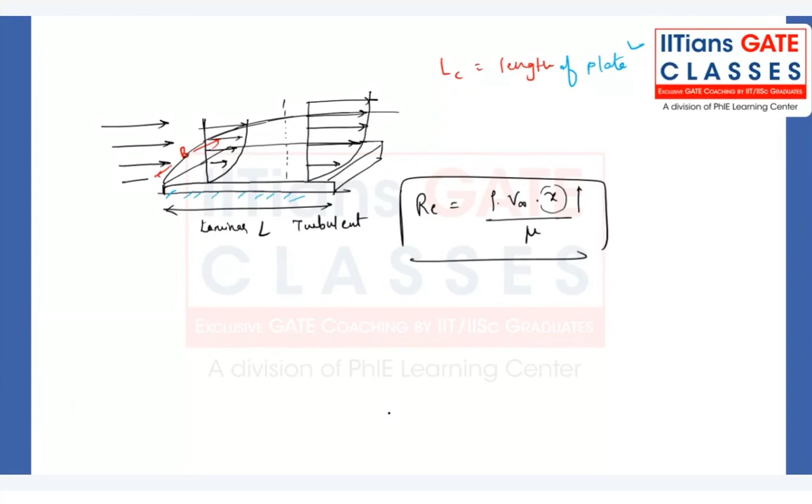Now, so all of you might be knowing this flat plate, this diameter case, but let me ask you one more question. Suppose you have a particular section made up like this, having dimensions b, l, and height h, and the flow is happening like this. Now tell me, out of these three dimensions, which will be the characteristic length value for this case?

A closed conduit channel in which fluid is flowing, or maybe a square cross sectional channel in which the fluid is flowing. Fully flow is there, not half flow, a fully flow is there. The full wall has been wetted by the liquid, for example. Tell me guys.

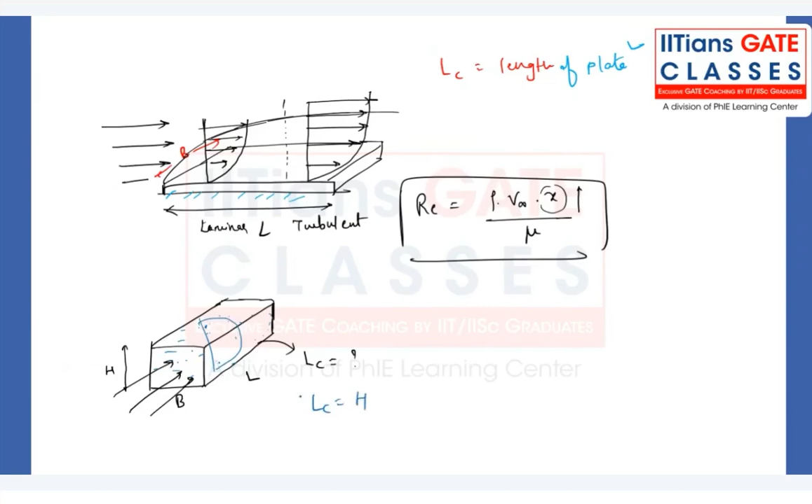Once again, when the flow is happening, between the top and bottom plate, definitely there will be some kind of velocity variations along the height. So LC will be h over here, and the picture will be more clear when we discuss fluid kinematics, that is types of fluid flow: 1D, 2D, 3D. I will take this example.

No, h will be there. Getting my point? Seeing the fluid flow directions, only h will be useful for us. Why will b not be there? See, that depends on the end condition, right? Here the bottom plate is fixed, and the top one is fixed too, for example. In that case, h will be important for us. In case this face and this face, the left and right, are also fixed, then b and h both will be important. Getting my point?

Tell me guys. Suppose the top plate and bottom plate I have taken, h is there, so the fluid flow will be happening like this. So at the top and bottom both are fixed, that's why it is getting zero velocity. The variations are happening over the height, right? So in that case, LC will be height.

But suppose this particular surface and this left one is also fixed. In that case, what is happening? The variations will be happening on that side also, when you see from the top view. Getting my point? Understanding or not? Not understanding?

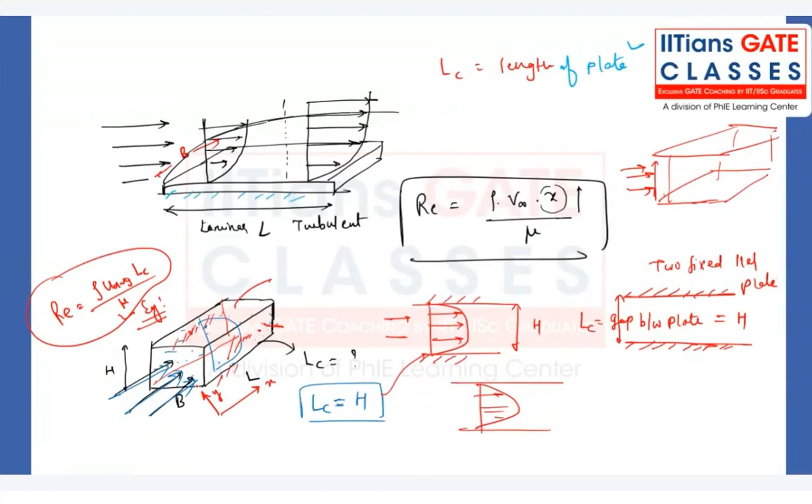Now, guys, it is clear now why in case of pipe flow we are not bothering about the length, because after a certain distance, the fluid becomes fully developed, and in that case the velocity profile will not change. So there is no need to think of length variation. Rather, we have to consider radius variations, along the diameter, how the variation in velocity is happening, and that is more important for us. Whether it is a parabola, whether it is logarithmic, that is important.

In case of 3D flow, along which side are properties maximum? See, generally, one more thing we will be dealing with in fluid kinematics. Suppose we are having a phenomena like this: velocity, fluid is flowing in this direction. So we are considering 1D flow, right?

This is simple Couette flow where dou P by dou X is 0. Generally we write the momentum equation in the X direction, we are bothering only about the X direction. But when you consider the Z direction, the property variations are usually considered negligible. Whatever variations happen in the Z direction, perpendicular to the plane of the board, we tend to think of it as negligible. So one more dilemma is there: when the dimensions are very very large, almost infinite in certain directions, in that direction generally the fluid properties vary almost negligibly. Getting my point?